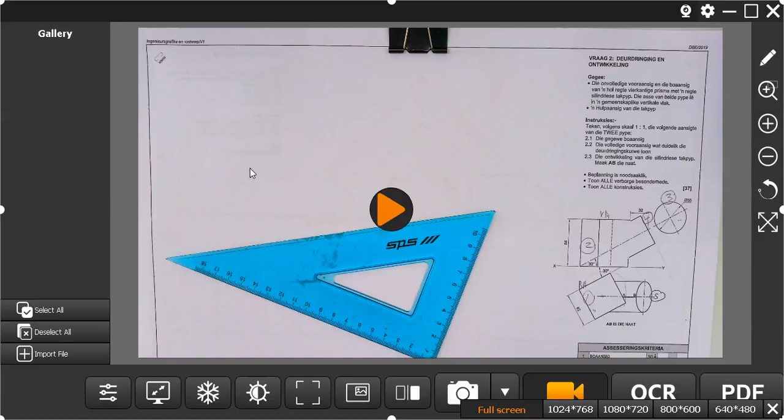This is page 23-24 in the Department of Basic Education booklet. This is at 30 degrees, and I'm going to start on the left hand side of the page. Step 1, step 2, step 3, step 4 is that part. Step 5, you're going to draw a circle here and this part, then you do the interpenetration. That's step 7, and step 8 will be to unfold the whole thing.

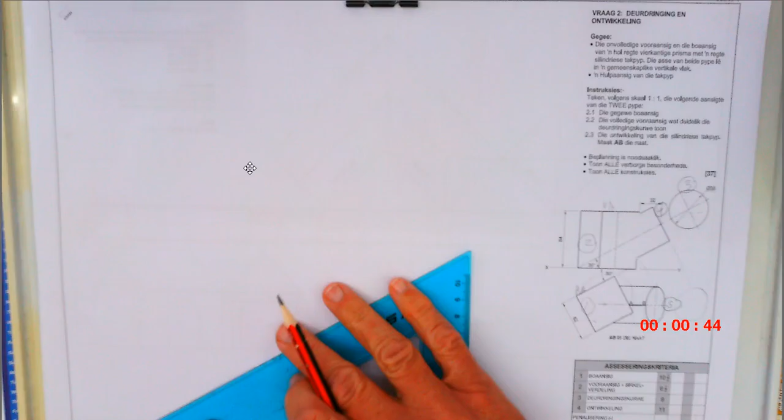So I'm going to start here, beginning with this bottom line. To make it easy, if I swivel my triangle at 60 degrees, I'll get that 90-degree angle there. I'm going to do this quickly. Start low on your page. I'm going to make this 62 millimeters.

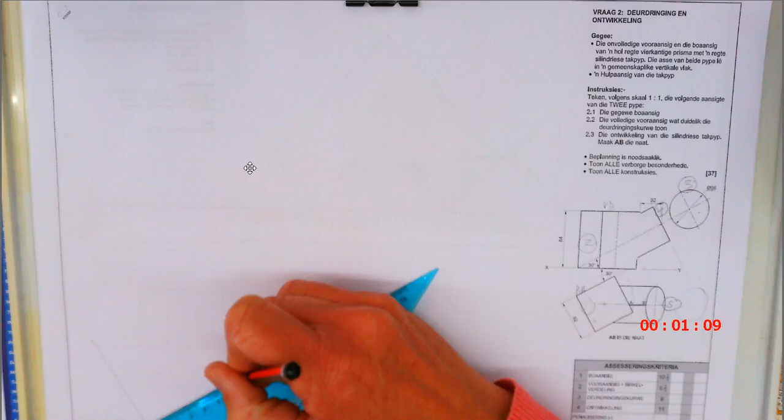There's 62 there and 62 here. 62 and 62, I'm going to quickly draw this one here. I'm going to draw this construction line, and I'm going to draw the 30-degree line over there. Your accuracy is important.

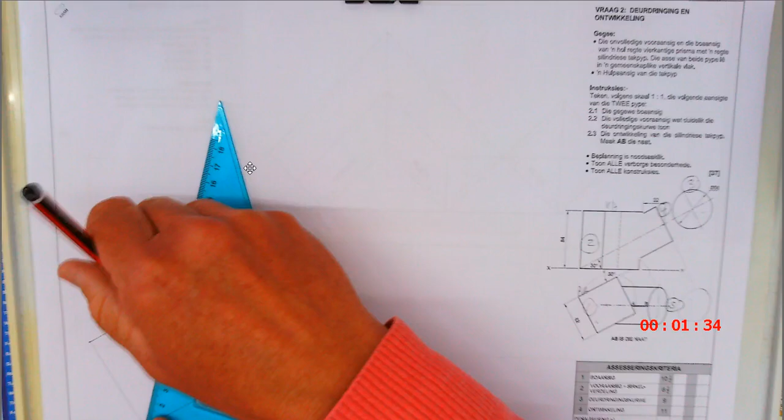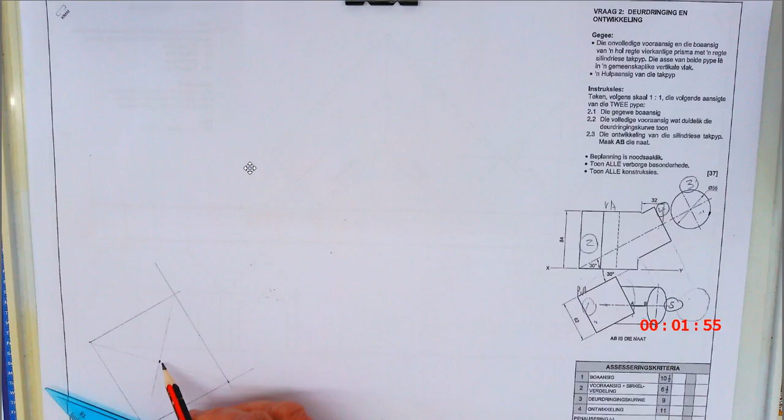Then I'm going to get the center point of this object, which is very easy to do. I'm just going to draw a construction line here in the middle, and another construction line across over there. There's my midpoint, I'll need it. The reason I need the center point is the other object will be in line. That circle, that pipe, is in line with that center point. That is why this is important. So that point is that point.

Step 2 is to draw the front view partly. So I'm going to project those lines upward. I'm going to project this up also, taking this line up. The height of this thing is 84, so I'm just going to move up and draw a line here.

The distance in between the two views is not important. 84 millimeters, so I'm going to measure it off there. There's 84, 84.

There's step 2. I'm going to draw the side one here, and draw this line. Invisible line - that's going to be a dotted line, a hidden line. I'm just going to do that, a quick hidden line there.

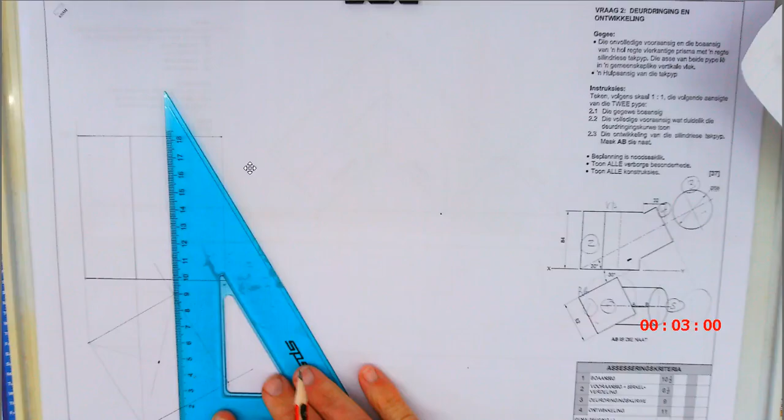I've got a piece of a line there, and then they tell me out of that corner I've got a 30-degree line running out for the pipe that's coming in. So I'm going to draw a center line from there, going into it, since that's the middle of that pipe. I'm just going to extend this line nice and long.

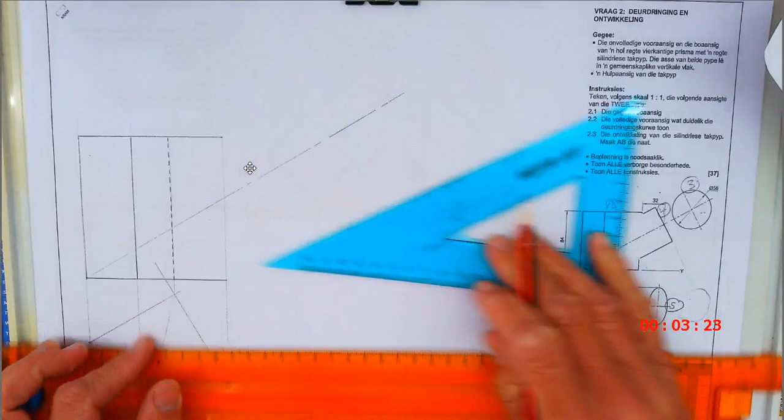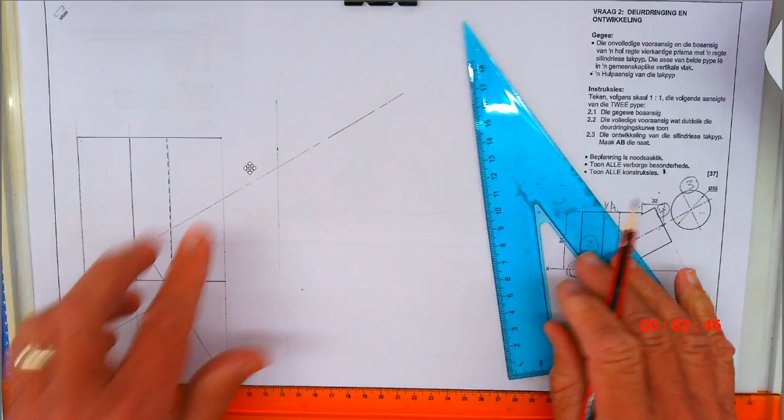What they tell me is that the center point of this circle must be 32 millimeters from that corner there. So I'm going to measure 32: 10, 20, 30, 31, 32. I'm going to draw my construction line there. That's 32, that space. And where those two lines intersect is that point there.

So I'm going to work at 60 degrees now. Why 60 degrees? Because 30 and 60 will give me a 90-degree corner there. So I'm going to draw this in quickly.

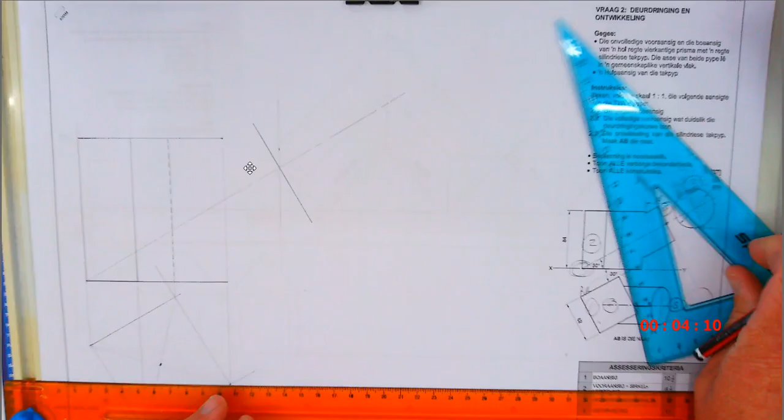The diameter of that pipe is 56, so that's 28 to each side. That's going to be 28 towards each side. So 10, 20, 25, 26, 27, 28, there's that one. 10, 20, 25, 26, 27, 28, there's that one. I'll draw those lines in quickly.

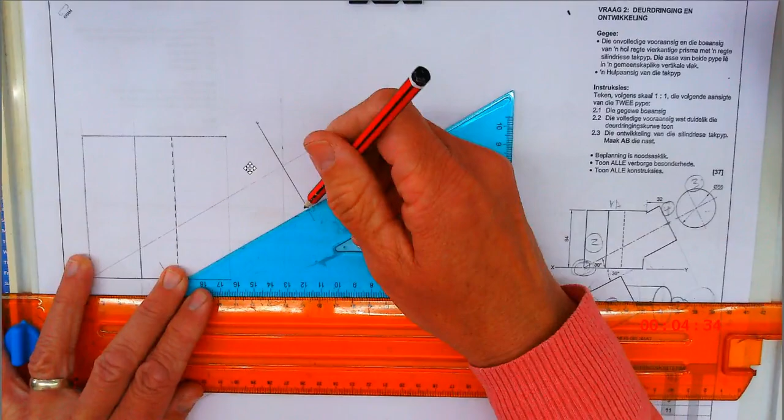At 30 degrees, I'm going to draw that in at 30 degrees. I don't know exactly what this thing is going to look like yet, but I am going to draw this part in for now, and I'll also draw my center line in my top view as long.

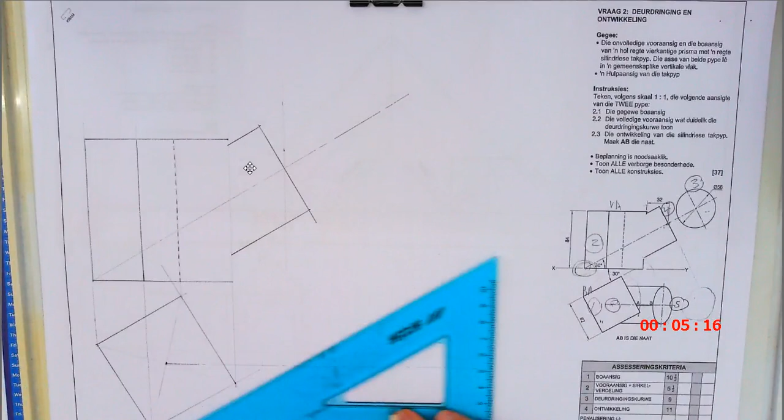Now the steps I'm following are the same regardless of what object you're doing. If it's an angled pipe, these will be your steps. You can remember it - it might just be a different shape in the future. This isn't really that much of a difficult drawing. It's got one or two little things, but it's not that difficult.

I'm going to draw this one quickly to there. Now the next thing I'm going to do is draw this circle and divide it into 12. I'm going to draw this circle and divide it into 12, and then I'll give you some tips as to know where the points will be.

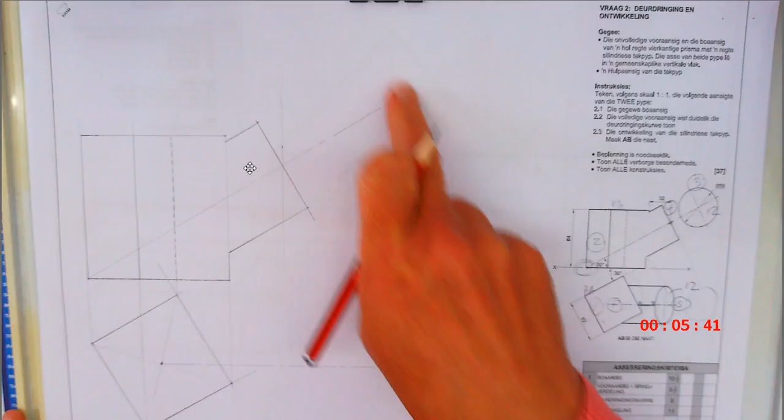So you can quickly draw the circle there, you can draw the circle over here. It's a circle with a diameter of 56. So radius 28 is going to give me that 56. This should correspond with what I have over here.

So I'm going to place it exactly in the middle there. Any distance away - let's place it a bit closer. I'm going to place it a little bit closer, and draw my circle over here.

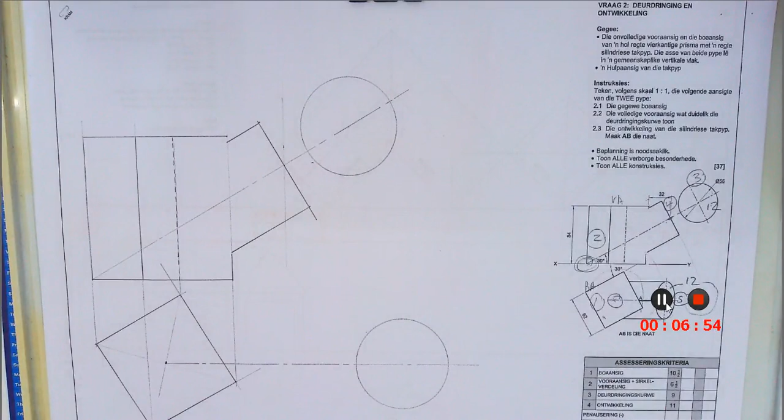Okay, so what we're going to do now is divide this thing up into 12 equal parts. Here are one or two things you need to keep in mind. I'm going to start at the top.

I'm going to start here in the top view, and I'm going to draw a center line here. Now I'm going to use my 30-60 degree triangle to divide this thing up into 12 equal parts. So I'm going to draw a line here. You all know the story already.

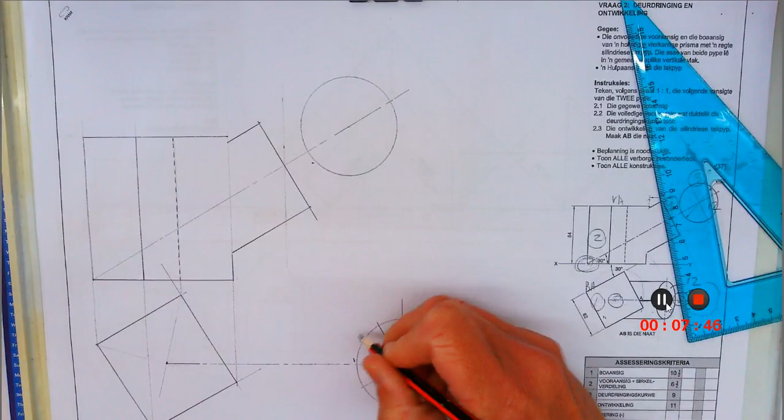Okay, and now you can number it however you think is best. So what I'm going to do is start my point 1 here in the center. So I'm going to start there: 1, 2, 3, 4, 5, 6, 7, 8, 9, 10, 11, 12.

There's my points. Now what I need to take into account, and I want you guys to just quickly focus on what I'm going to be saying now: remember, this pipe is actually a mirror image.

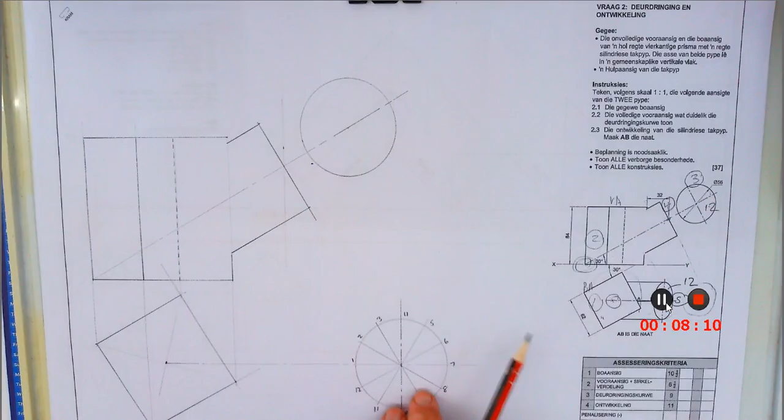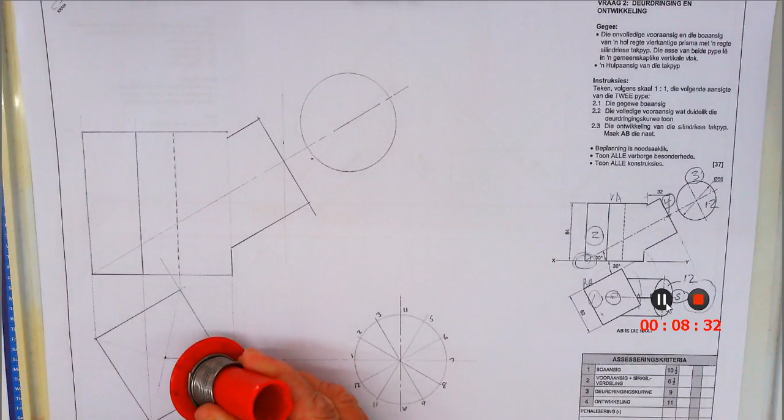So just so that you guys can understand the principle behind this, if I have a round object, let's say I have a pipe that's sitting like this, and I've got 2 points here, 2 points there, and 12 points overall, this is an oval shape.

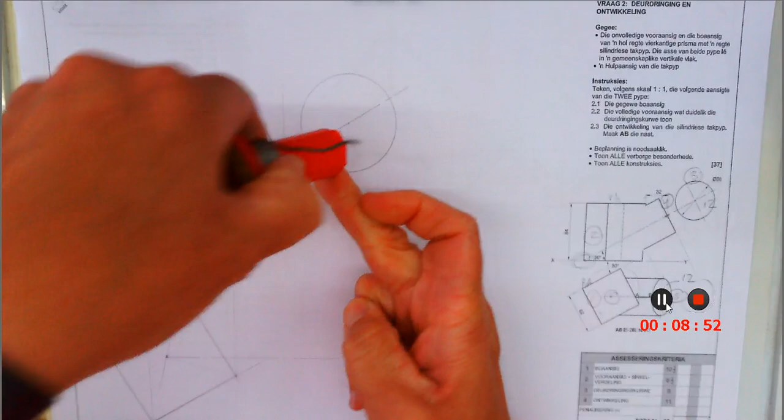But to get this picture, what has happened? I've done this. And when you guys are looking at this pipe, this thing is now swiveled into this position, and now it's swiveled out again, like this. So the pipe that turned like this, also turned like this.

So you have to keep track of where your points are going to be. If you get this part wrong, you cannot do the development. It's a small bit of thinking work, really not difficult.

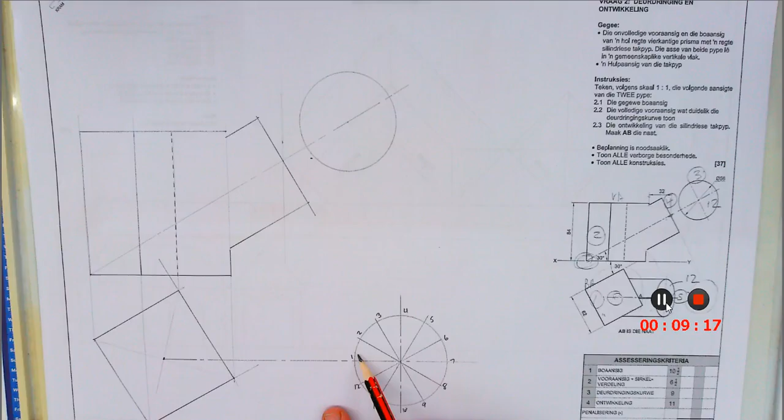So what is the easiest way to do this? The easiest way is to get 4 points. So for instance, take 1, 7, 4 and 10. Because if you've got those, you will know where 2, 3, 5, 6 and all the other ones are.

Okay, so what I'm going to do is swivel it around. This means that on this thing, this will always be a mirror image for the reason that I just explained. So 7 will be there, 1 will be there, 4 will be there, and 10 will be over here. I want you guys to just write that in.

If this thing swivels upward, 10 will be in front of you, 4 will be in the back, point 7 is going to be over here, and what's that one? 7 is going to be at the top, 10 is going to be there, and what was this? Point 1.

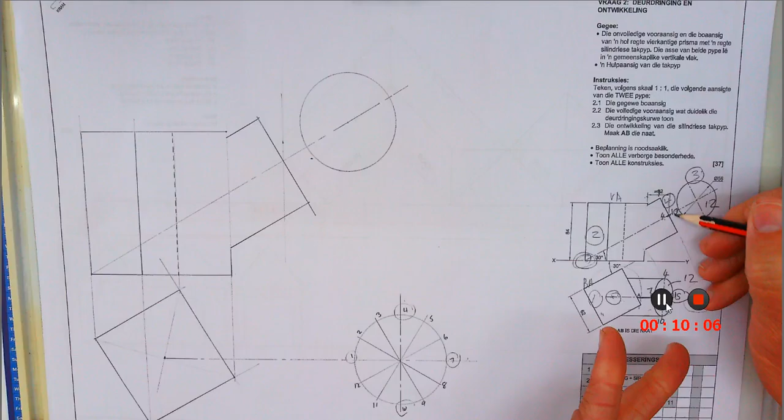Okay, so when I swivel this out again as a mirror image, this would mean point 7 is going to be there, point 1 is going to be over here, point 10 is closest to me, so as this thing swivels out, 10 will be furthest away from me, and 4 will be over there. Once you have these points, you can get the other ones very easily.

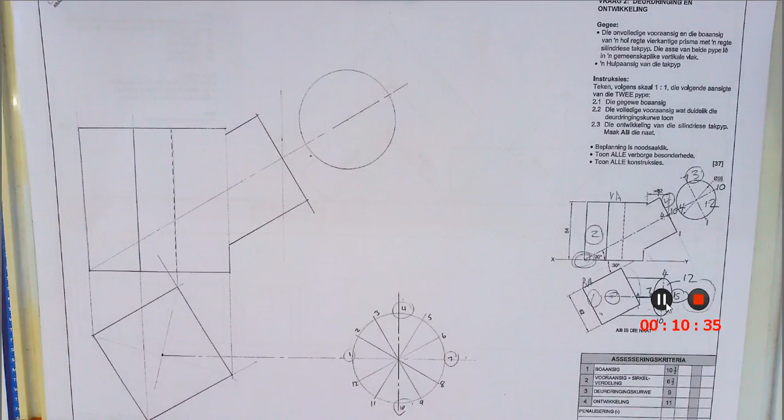Okay, so what I want you guys to do is just put those numbers in there quickly, and then we will divide that up as well.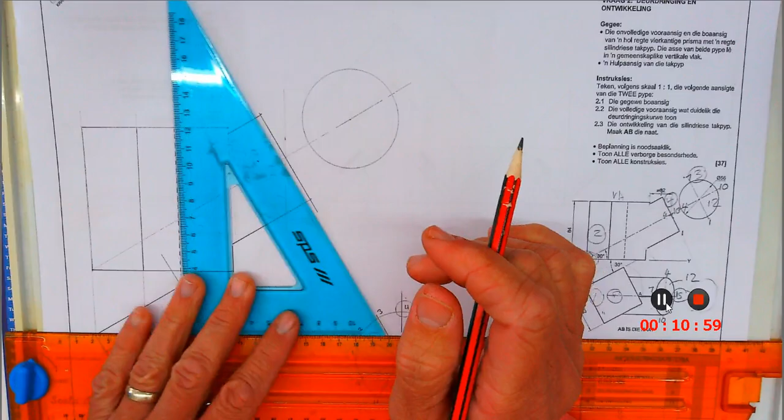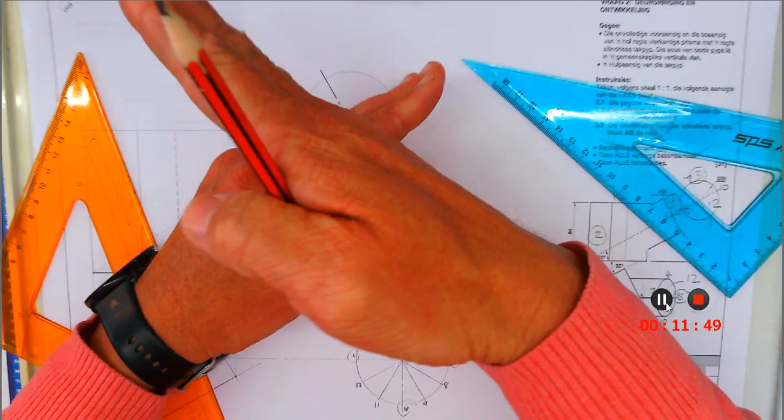Now I need to do something different. In this case, I can divide it up - normally I do the 30-60 degree divisions. What I'm going to have to do now is put a triangle or ruler on that surface. Why? Because I need to divide this into 12 parts too. I can't just place my triangle normally because the pipe lies at an angle - the same center lines you have here are now at an angle, so I need to put my triangle on that line, using my 30-degree triangle to divide it into 12 equal parts, just like you did at the bottom.

I'm going to shift this back a bit, I'm a bit out of space here. Just very quickly, if your time is limited, you can also just do 2 of the divisions - I'll show you this one too. If you've done these 2, you can get the other ones, so if I have those 2 and those 2, the rest will literally just shift over here.

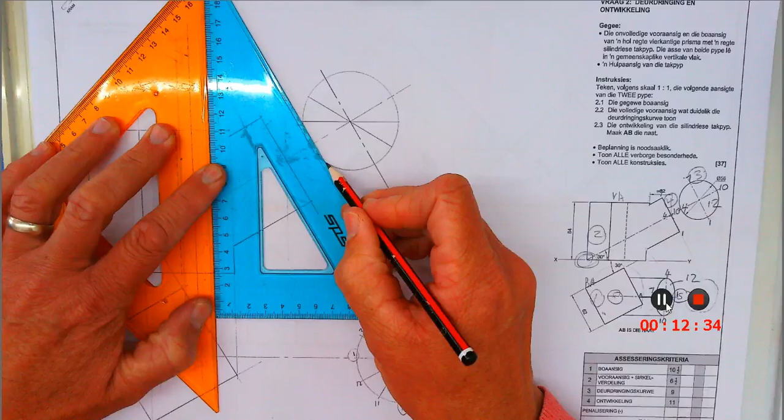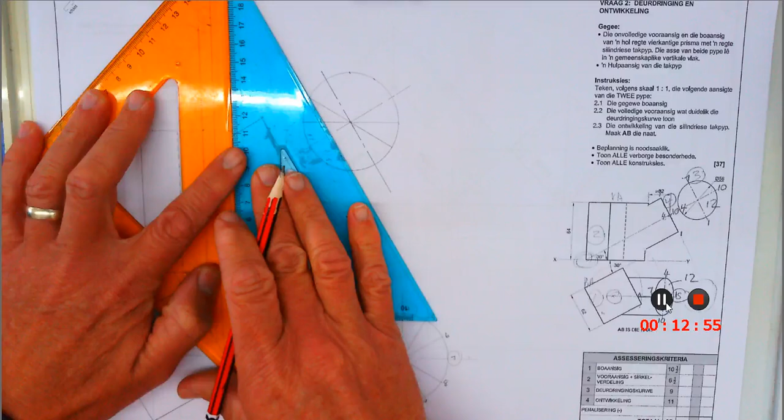I'm a bit out of space here with all the stuff, the camera and everything, so I'm just going to move those points over to the other side of that circle, but it will obviously give me the same points. It's the same method you guys need to follow as what we did at the bottom - I'm just doing it this way because I can't fit my triangle in with the camera situated here. Why am I dividing the circle up? Because otherwise I cannot do the development. It's very simple.

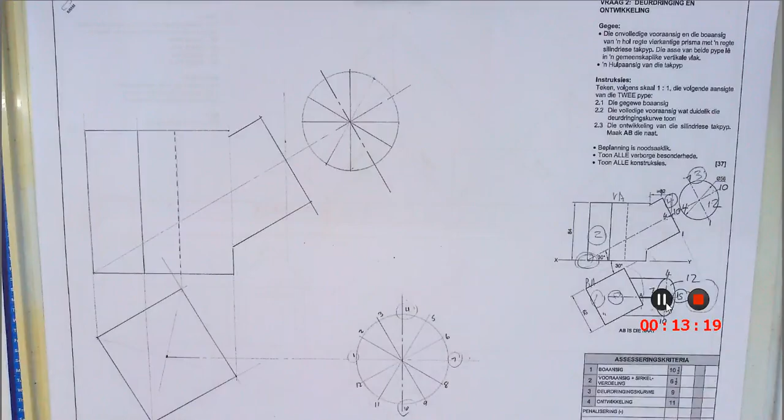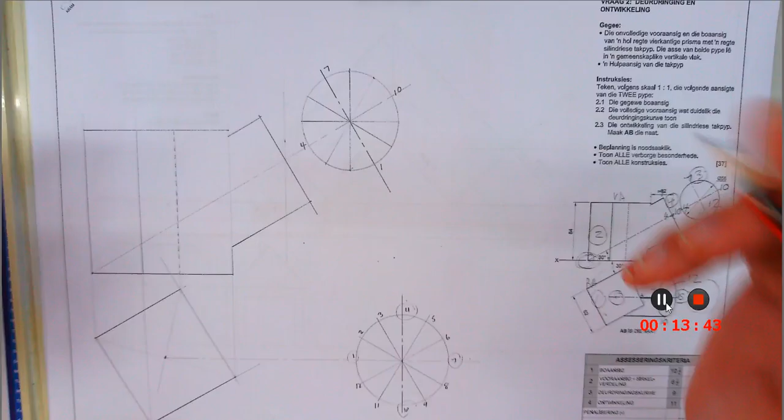What I'm going to do here is put in my numbers. So you guys know now, 1 is here, 7 is here, 4 is going to be over there, 10 is going to be over here. Remember, closest to you is going to be furthest away. 7 that lies there now is going to be on this side - so it's 4, 5, 6, 7, 8, 9, 10, 11, 12, 1, 2 and 3.

Good, once you've got this, we can go ahead and do the next step. I'm going to show you guys quickly how we're going to get this oval shape here. To get that oval shape, I'm going to project back at 30 degrees, as you guys see it here - I'm going to project back at 30 degrees. I'm just going to do this in pen for you guys.

I draw that like a construction line to there. I'm going to write 2 and 12 there. I'm going to project that back this way - actually I need to project it all the way through, just a little bit further. I'm doing this in pen, but please guys, don't use pen. They don't mark pen in the exam. Also, they don't mark freehand in the final matric exam.

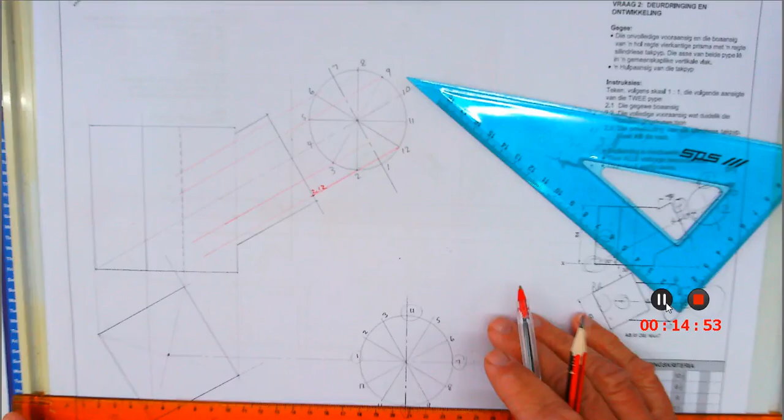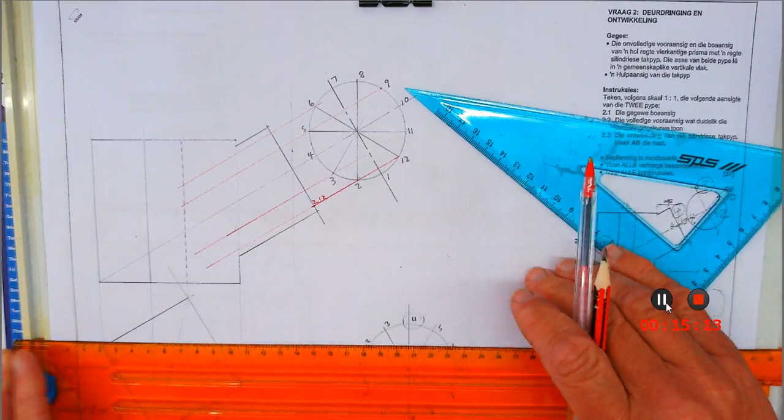And I'm going to project this over here too - taking all these lines across. Make sure that your ruler is not wobbly - I press it firmly against the side to make sure my lines project properly across. Also make sure your paper doesn't shift - that has happened to me more than once, and then my drawing is out. I'm going to put that in quickly.

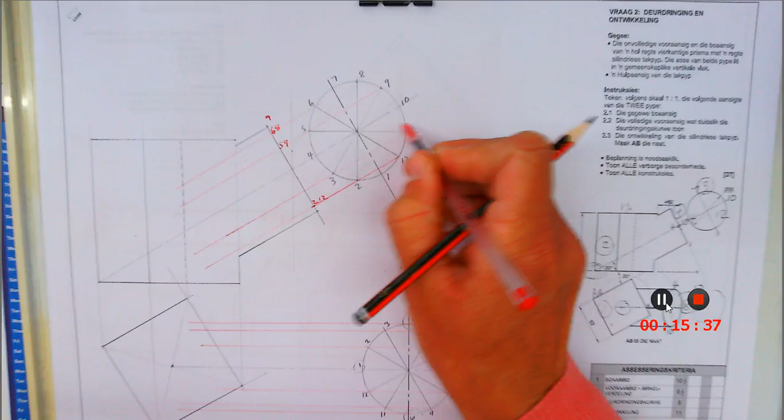Going to put this one in. Okay, now we're in business. What I'm going to do now is put my numbers on here - there's 7, 6 and 8. I'm going to have 5 and 9, 4 and 10, 3 and 11, 2 and 12, and point 1.

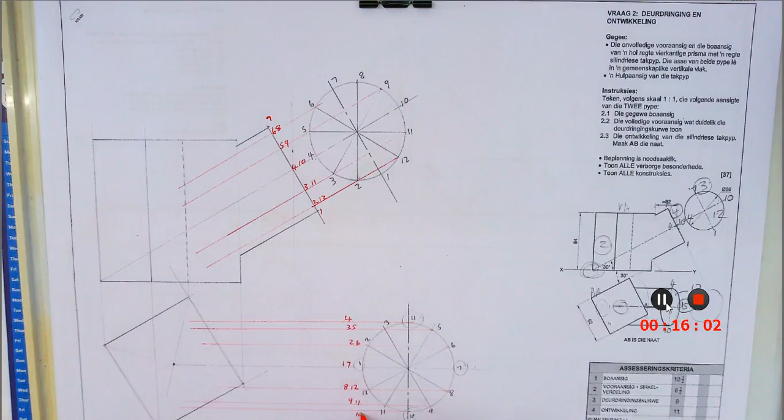In the same way I'm going to have here for 4, 3 and 5, 2 and 6, 1 and 7, 12 - let's say 8 and 12, I'm going to have 9 and 11, and I'm going to have 10. So I'm just putting the same numbers here, the same numbers there, and I just connect it.

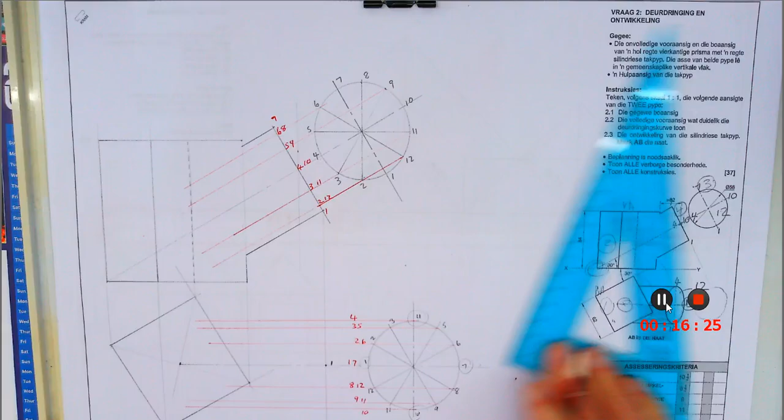So what I'm going to do is, 1 and 1 gives you 1 - not in mathematics, but yeah. So if you bring 1 down, you don't have to think about this number, there's point 1. As I bring this line down for 2 and 12, you're going to see a pattern here - 12 symmetrically on the other side, you're going to have point 2. So there's point 2 and point 12.

I'm going to do 3 and 11 - you just continue in this same manner. There's also 3, there's 3 and there's 11. I do the same for 4 and for 10 - just going to bring this down. 4 and I'm going to have point 10.

I'm going to bring down 5 and 9. Now it will be the same point that I have here. I'm going to have it on that side there. That will be 9, I can actually save some time.

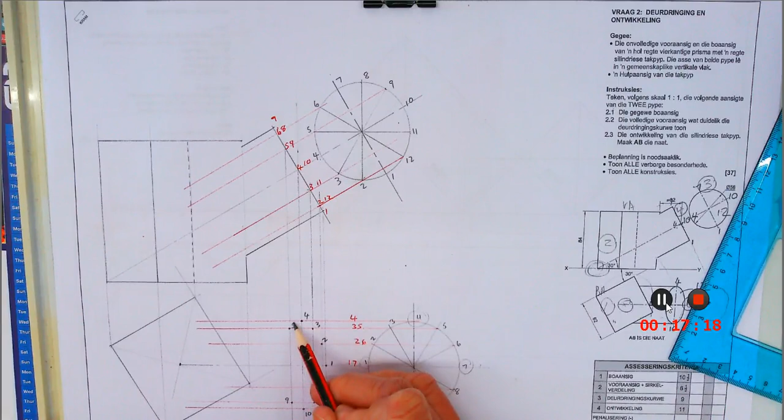This will be point 5, I am going to bring down this. If you want to save some time, you can just bring that down, bring this one down. If you can see the pattern here, if I have a line in the middle, the points on both sides will be symmetrical.

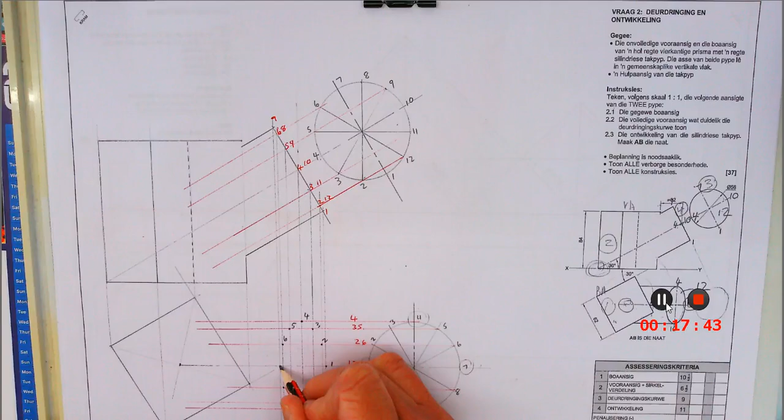Okay, you guys know the story already. I'm going to plot these points neatly freehand for myself. I'm going to first do this freehand to find the curve.

Put your hand normally on the inside of the curve, it makes it easier. My hand is now on the outside, but it's normally easier to have your hand on the inside of the curve.

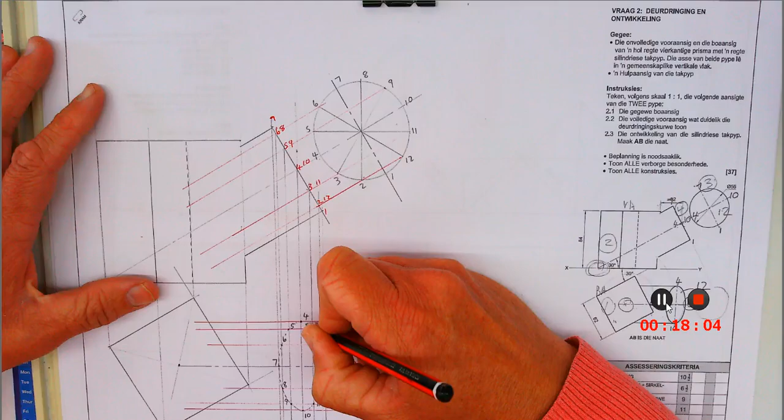There it is, just to save some time now, obviously you're going to use your French curve and your flexi curve to connect the same curves here. I'm not going to do that now, just simply to save time.

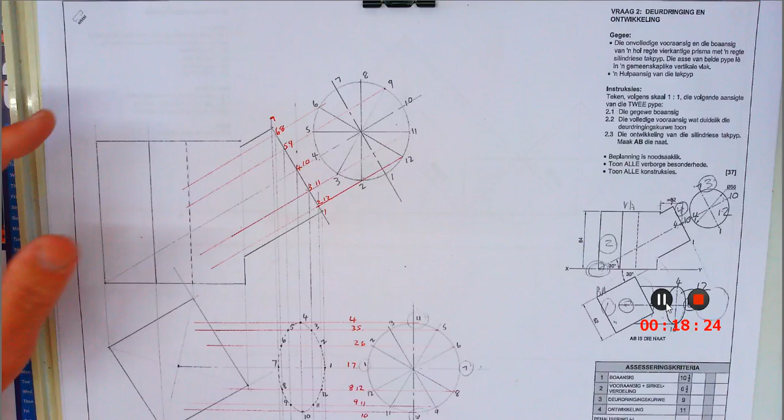The points that I'm interested in are the points that I am going to highlight now. The curve you're obviously going to draw, but now I'm just going to focus on these points here, because this is what's going to give me the answer.

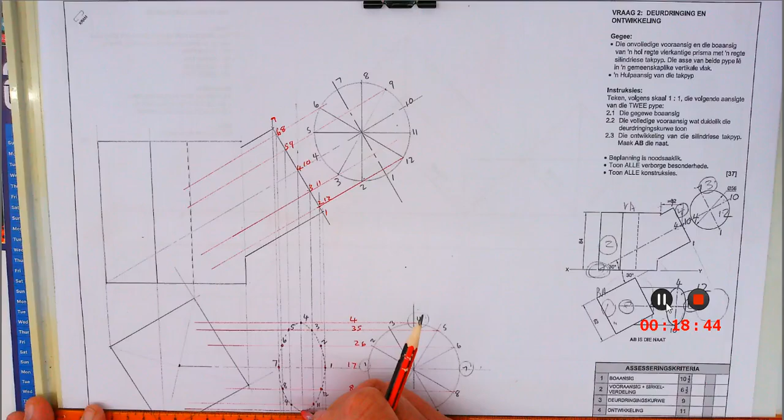Now you need to get 12 points. It's very easy. Where 10 goes in, here's my first line. If you want to use color for this exercise, you can do that. Where 10 goes in, I just take it up, guys, I don't have to think about it, I just match the number. So where 10 goes in, I go up, there's 10, I go back. As I plot my point, I put a 10 there.

Okay, I do the next one, 9 and 11. The one at the top will be 9, so this is 9 and 11. 1 is at the top, 9 is at the top, 11 is at the bottom, so I take it up. There it is, 9 is there, and 11 is here. Right?

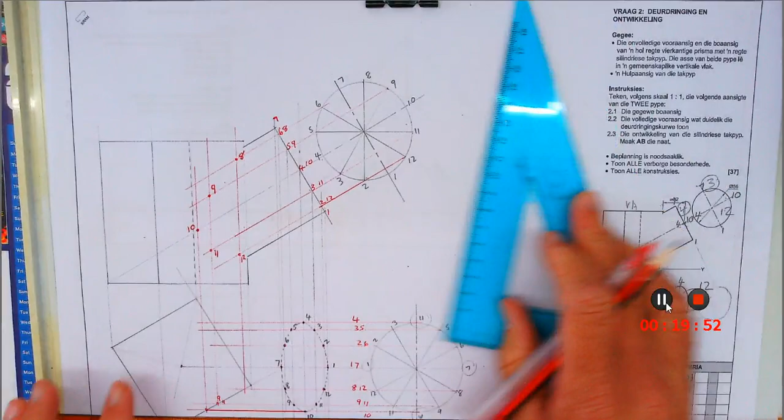There's 8 and 12, 7 is going to go up here, I'm going to take it up there. 7 is going to be by 7. So this is the line for 7 and 1. I'm going to quickly take it up.

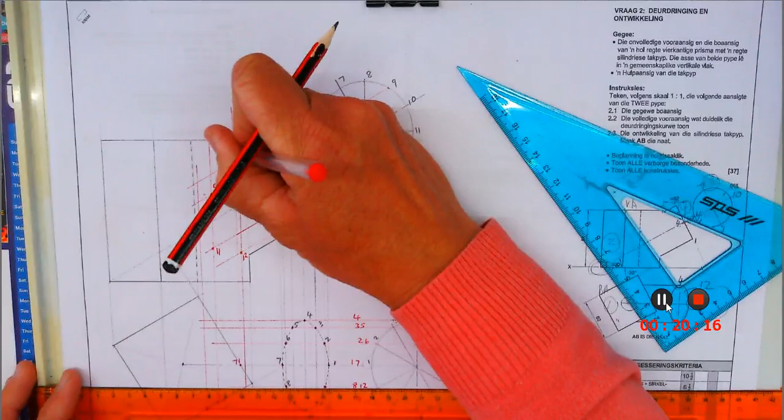That will be a hidden line. I'll say something about that now just now. That will be point 7. And the point 1 is going to be this one over here. Point 1 is also going to be a little bit further into this thing.

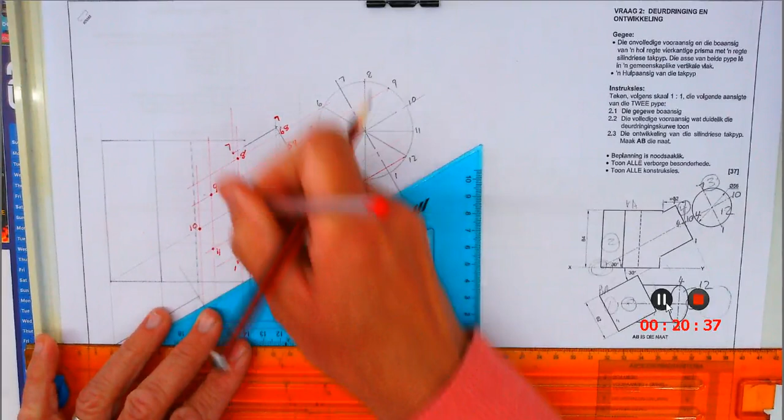There is my point 1, there is my point 7. Let's see what we still need. Point 6 and 2, I'm going to take that up. Take it up, let's quickly look. Here is 6 and 2. I can write here 8 and 12 just to make it easier for myself. 5 and 3 will be over here. And 4 will be over there.

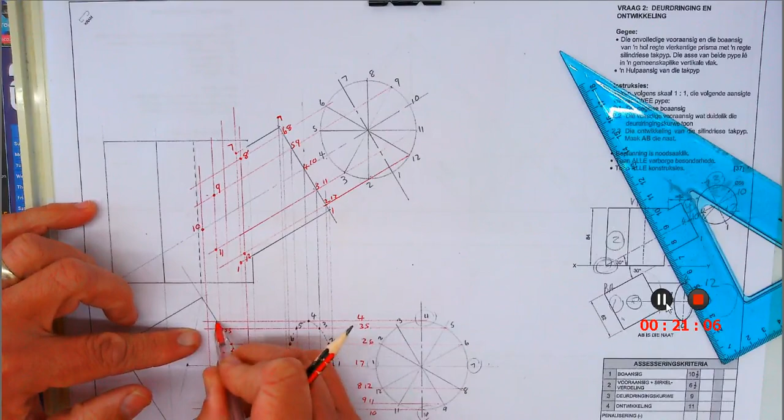Okay, let's quickly look. 7 and 1, let's see if we already have it. We have it for 7, we have it for 1. 6 and 2, 6 and 2 will be over there. 2. And 6 will be over there.

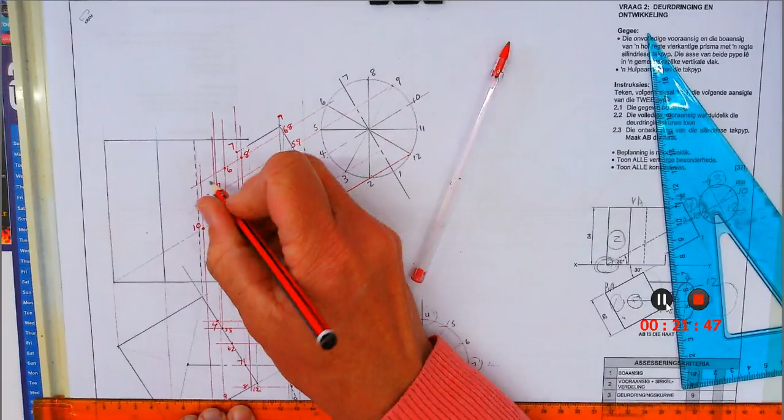Right, then I have 5 and 3. It's not on the same line, it's on a different line according to my drawing. 5 and 3, 5 will be over there. I'm just going to make a dot there in pencil. That's 5, and point 3 is going to be over there.

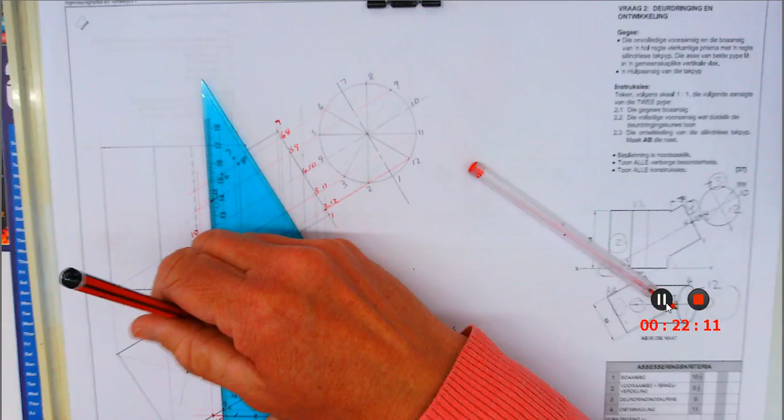And there is 3. Look, do this just in pencil, then it's a bit easier to see. point 4, I'm just going to get point 4 as well, and I take it up there. There is point 4. Okay, as you can count, if you can count, you can do this.

Alright, so let's just quickly look at a few important things here. There is a bit of a thing we just quickly have to think about. You guys also have a point here on the edge, just take note of this point.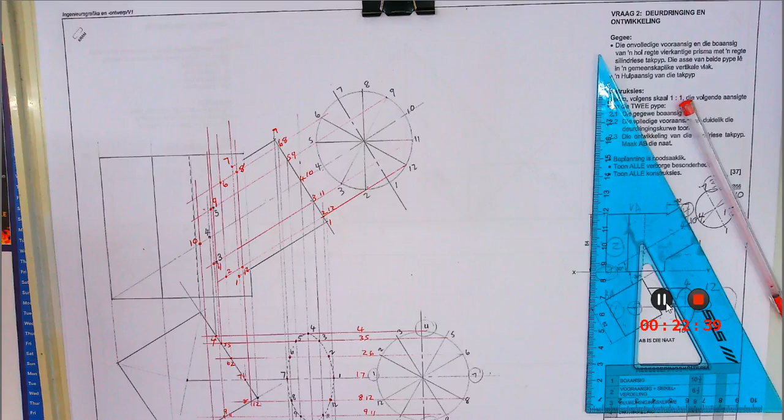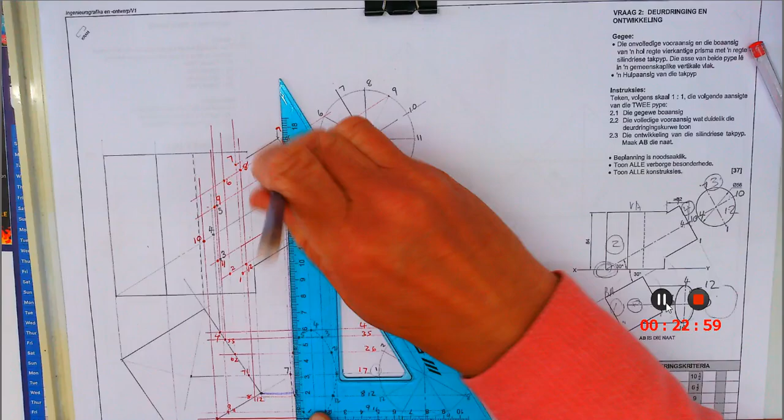Okay, I'm going to just see what happens here. I'm going to do this in a different color for you, I'm going to do this in purple. I'm going to take this line up to this point, project it up. I'm going to tell you now what it's for, and I'm going to project that back. Why did I do this?

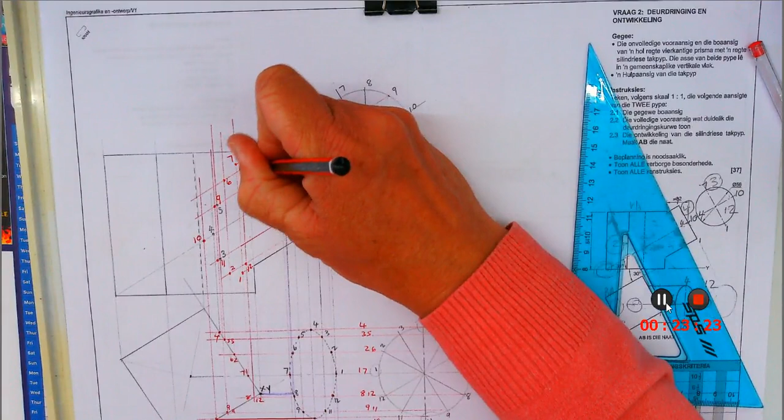I'm going to call this point X and that one Y. This one is going to be point X, and that point is going to be the point where this thing is going to end there.

Okay, I'll give you some information about that in a moment. At the bottom, I'm going to have a similar point. I'm just going to do this one in... not green, let me find another color. I'll do the other one in gray.

So I'm just going to project this back to my curve. I'm going to project up, project back, and go in line with that thing there. Okay, so what have I done here?

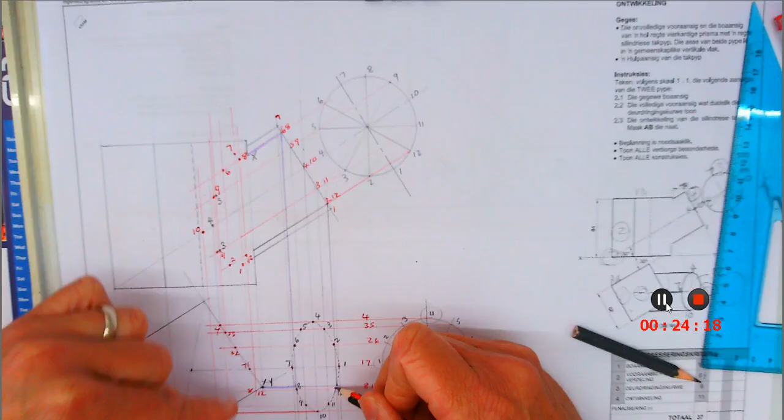Guys, what happens here is from this point, beyond this point, the curve will go around the thing at the back. So we cannot skip these 2 points - this is the catch in this whole thing. That point there and that point there, the X and the Y, that's the only thing that has got a bit extra to it. So you can use this parallel up, back thing, and there, and there, to determine those 2 points.

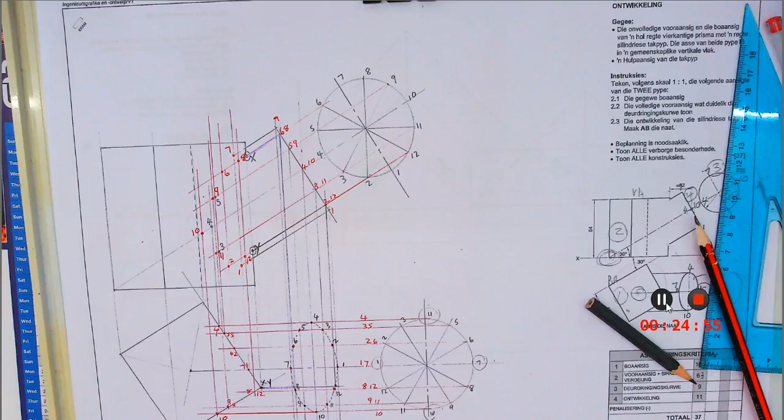Everything from here - I want you to look carefully at what I show. Everything that you guys see on this side of the drawing up to that point Y will all be visible. How do I know that? Because if I take a flashlight and shine it from here, it will cover everything up to that point there. Everything on this side will be visible. As soon as it goes around this corner here, it becomes invisible.

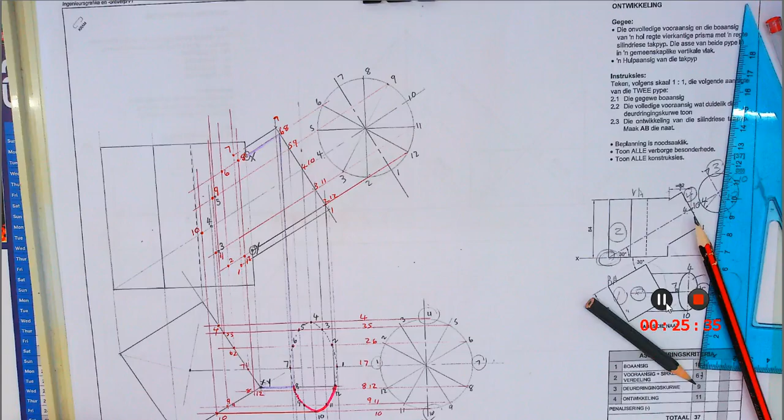Okay, so what I'm going to do is look at my numbers, and I'll do it quickly for you. I'm going to start here by point X. How I do this is I'm also going to project the X and the Y over onto this circle here. I'll tell you in a moment why I'm doing that.

It's going to mirror, so my point X is at the top, so X is now going to be over here - just make a note of that - and my point Y is going to be over here. Just write it in there. There's a reason why I've done it like this.

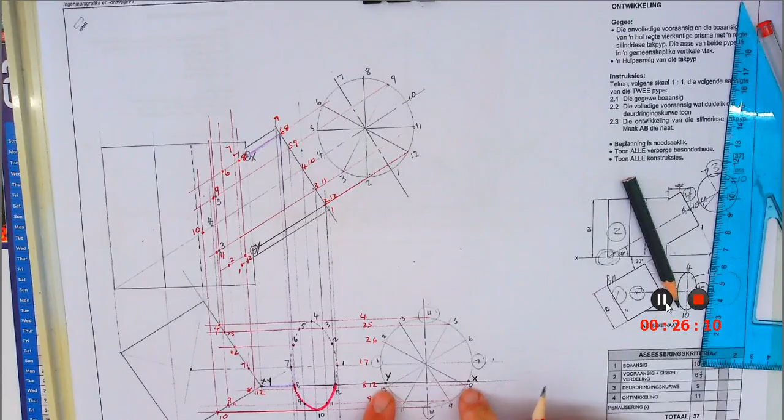The same thing we've done here, we can also do in this view. So these same points you can project over. This is the only snag to the drawing.

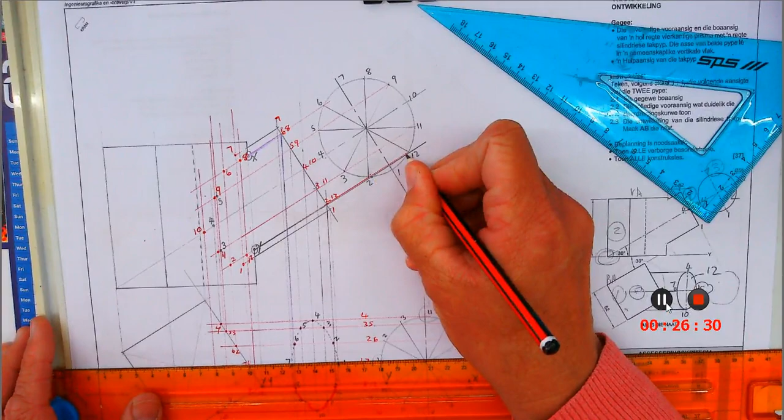Go and project it over there. You guys will have a point - you can have 2 points, well, it's actually 1 point. I'm going to make a number there and there. And I am also going to, let me just see, I'm just going to do this.

Make a mark there. So I can check here between 1 and 12 is Y, between 1 and 12 is Y, so it's going to be there. And between 7 and 8 is X, 7 and 8, so that's going to be point X there. Just make a note of those 2 points. We can come back to that later if it's necessary.

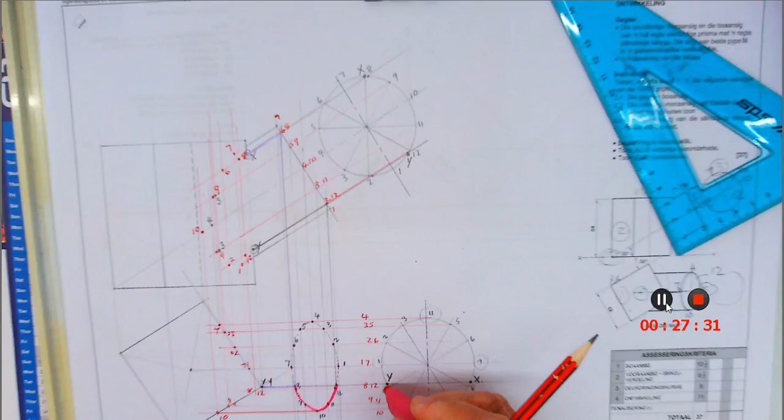Okay, now that you have this part, I use my numbering system to connect my points. So everything from X, 8, 9, 10, 11 and 12 to Y. So X, 8, 9, 10, 11, 12 and Y. So whatever you guys see from here to there is all visible.

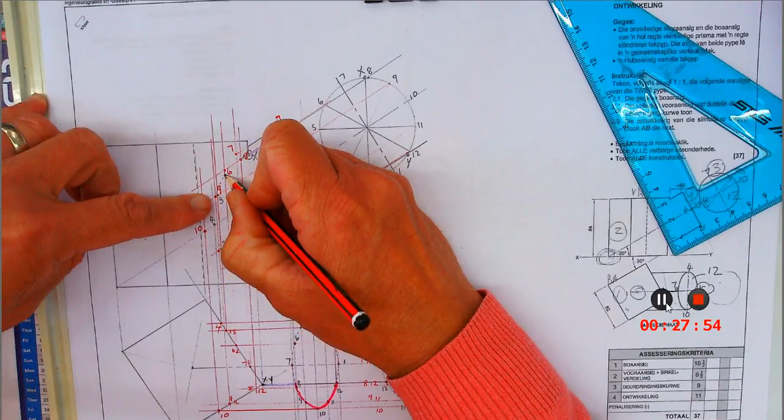Then it goes from 9 to 10. From 10 it goes to 11. From 11 it's going to go to 12, so 12 is over there. And from 12 it's going to go back to point Y.

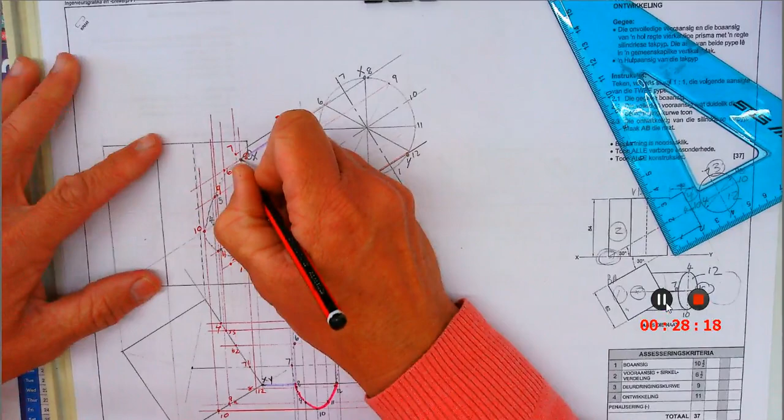Okay, now this is a curve, so you guys are going to have to - it might run a bit more like this - you're going to have to plot these points. If you feel that you struggle to see what that curve looks like, you can add your own points.